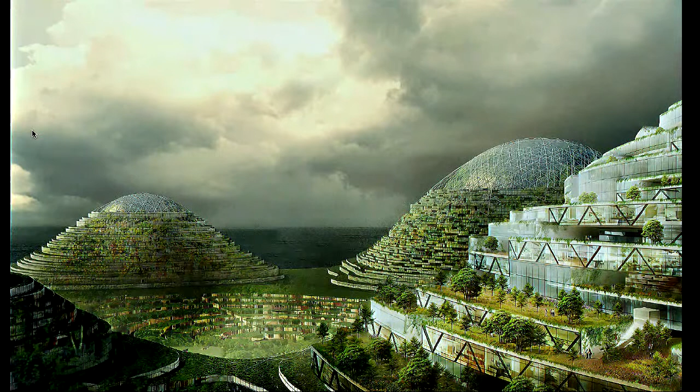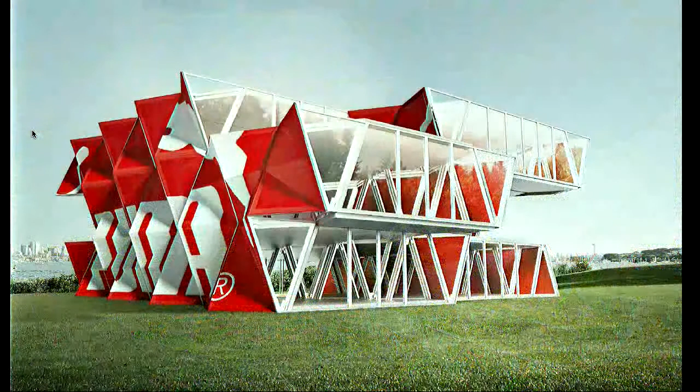It's pretty interesting because we are a group of 20 individuals, very smart individuals, with a background in architecture, design, and graphic design mostly. Our consultants range from structural engineers to landscapers to animators and many others who are constantly joining us on the different projects we're adapting.

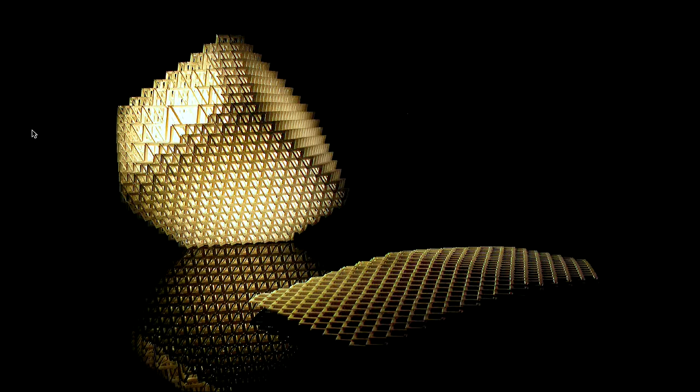We are committed to two things: innovation and improvement of well-being. I'm very lucky to be here today to share with you one idea that started some years ago.

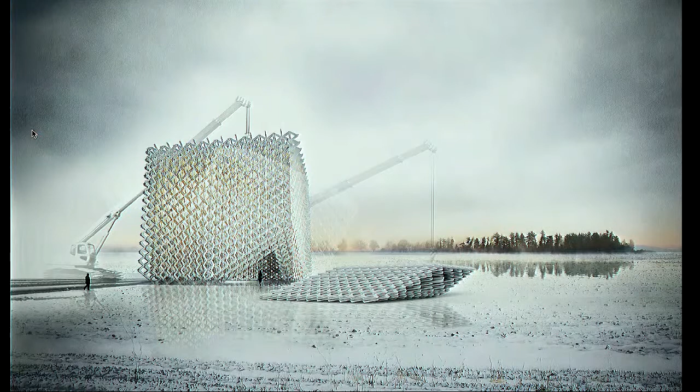In fact, in our workshop, we accidentally played with certain geometry and certain physical parts, and that actually started what we now have as our own R&D part of our practice, which constantly thinks about ideas that nobody, in fact, asks us to do.

So it was not born from an RFP. It was not born from any brief or request of a client. And in fact, it started and continued to a point where we actually bring different ideas and share them with different people.

The idea that we're going to share with you today was born from a conversation we had with Leticia, and she, in fact, is the one who believed that some of the things we've done could be beneficial for construction sites.

Today is, in fact, the first time that we're going to show this idea, in its current form. But prior to that, maybe we can speak a little bit about the condition of the sites.

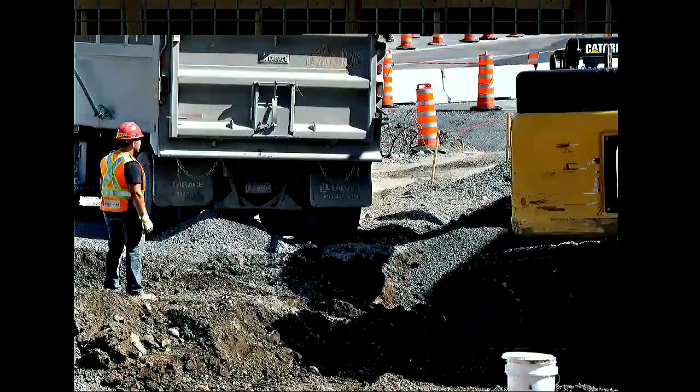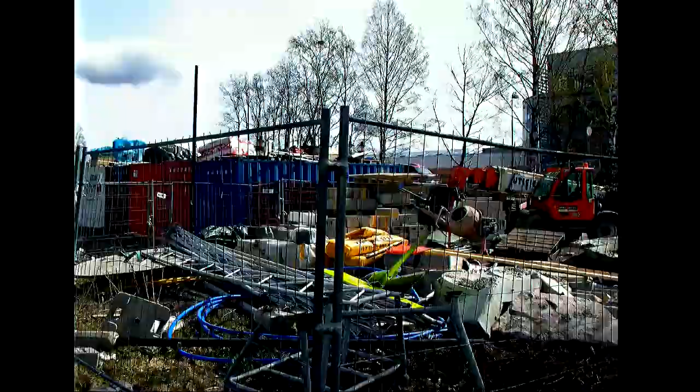Of course we've been speaking all day about construction sites, and I don't have to remind everyone what the pitfalls of construction sites are. In a few images we can see that construction sites are noisy, unfriendly, dirty, inaccessible, dangerous areas of the city, and throughout the course of their life they ultimately become very prohibitive areas in our various cities.

And we're all here today because this is not a small problem. In our day-to-day life in New York, countless construction sites shape the way that we experience the city.

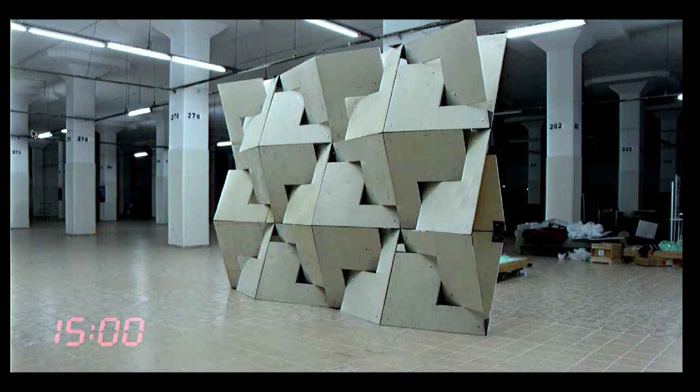So there's always this ability to basically position them next to each other, on top of one another, and create this kind of wall. We realized that basically what we invented at that point is a new typology, a new wall that can actually do a lot of different things.

What we're going to focus on today is the ability to use this construction method potentially for a construction barrier. This is pretty much the beginning of one idea that we're sharing here with you today. And of course, we know that there's a lot of different things we need to overcome before we can actually do that.

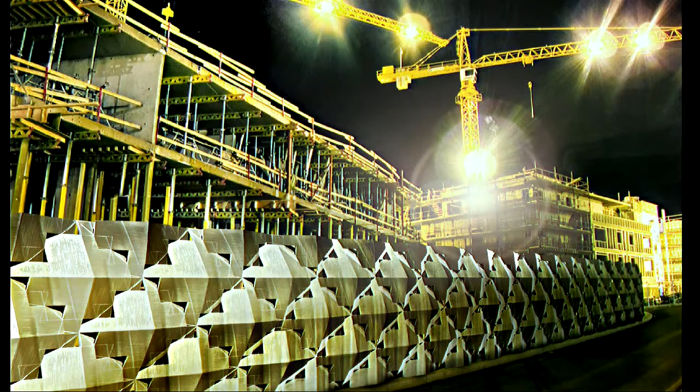One of the speakers before, Colin, was showing us that people walk slower next to something that is more attractive. And I was wondering, what does that mean? Does that mean those people are actually having more fun, enjoying themselves? Is that the reason why their pace is slower?

Can a construction site barrier do that? Can we think about them as beautiful elements rather than just reducing their ugly presence? So what we're trying to do is actually make them beautiful walls, which essentially are just a canvas.

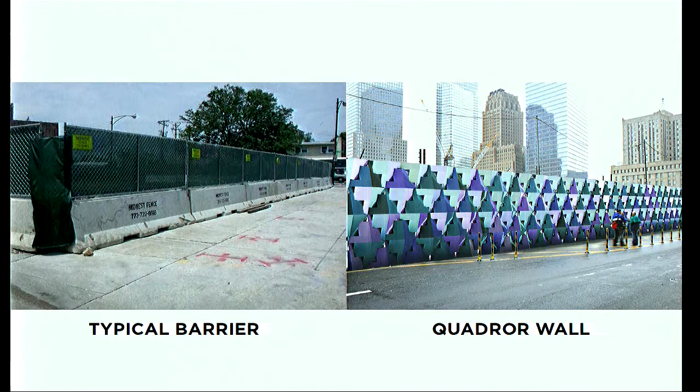We can invite artists to do different things with them. We can communicate messages with them. We can share what the construction is all about through a new type of wall, a new type of structure.

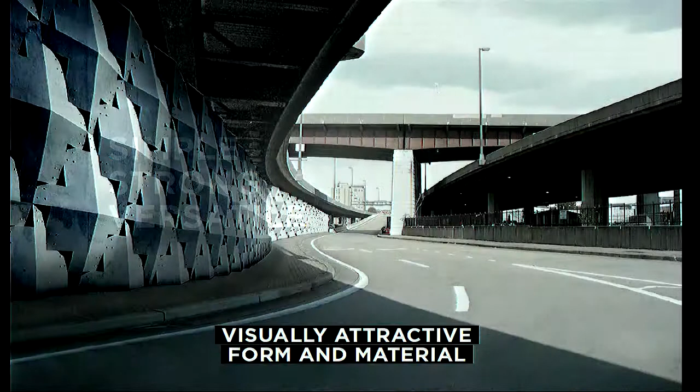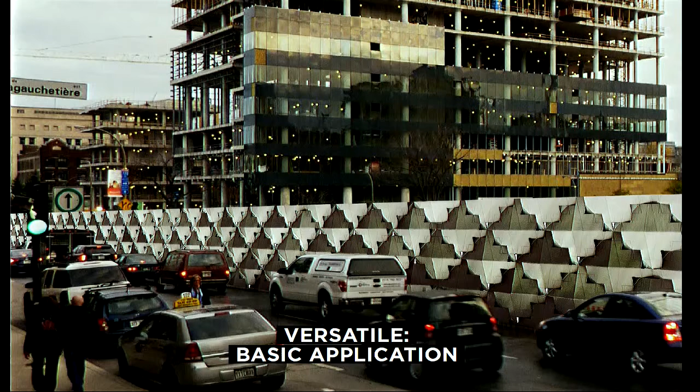It's simple, it's very strong, and it's very versatile. It can be made out of a lot of different kinds of materials and proportions, and that would affect the cost, the deployability, and the reusability of this construction barrier.

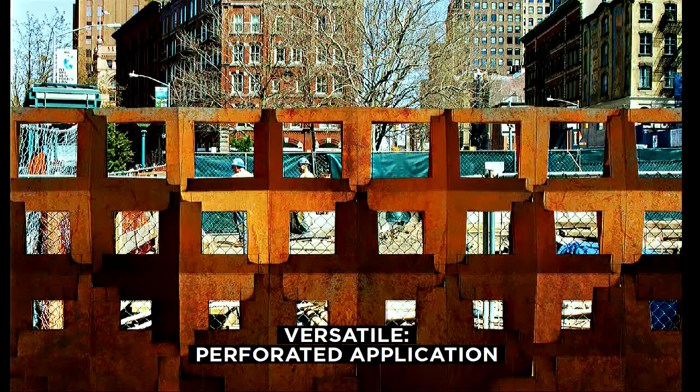I think as we could see in these examples, there's a versatility and playfulness that touches on a lot of the topics that came up today. There could be a vegetated application which engages passersby in a different way, or different perforated applications—just one instance of many possibilities to engage people on the sidewalk and give them a different understanding of what's inside the construction site.

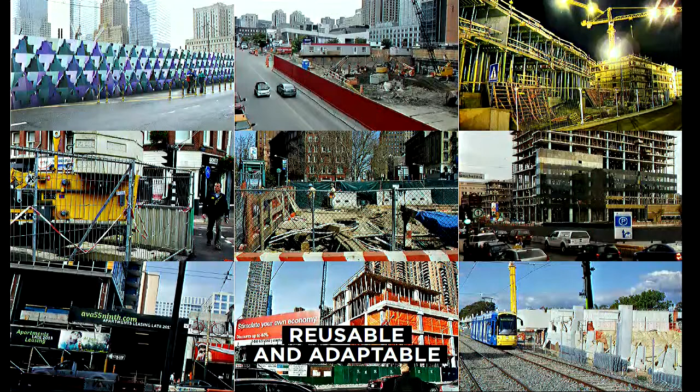And as we develop this, they would be reusable and adaptable depending on the different materials we explore and in which they are made. So they could have a variety of uses, and their lifespan could be a big plus for their application.

One thing we looked at, in collaboration with different engineers—we had quite a lot of conversation with the ARUP team in New York, who pointed out a very interesting fact: can those barriers improve the sound, can they actually reduce sound from a construction site? This is an assumption, because of the geometry it seems to be the case.

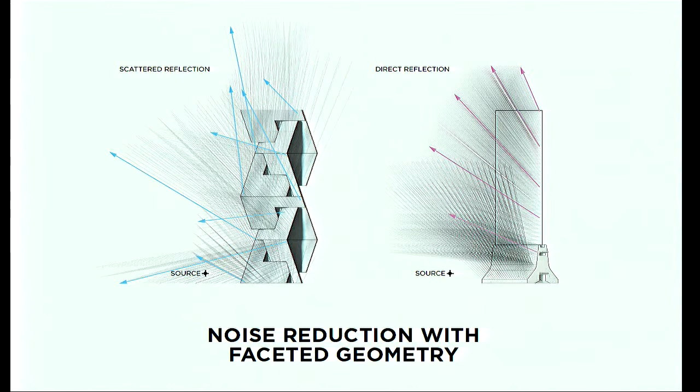I think in the previous presentation we've seen just one angled piece on top and the reduction of noise there. This is definitely something we're very much interested in investigating and checking further as we make them.

One other point: our main comparative point was the traditional Jersey barrier, which everyone is familiar with. So in terms of size and scalability, there's already an ability with the Quadror to have something familiar to the construction site in a very unfamiliar way, with a lot of potential for different uses.

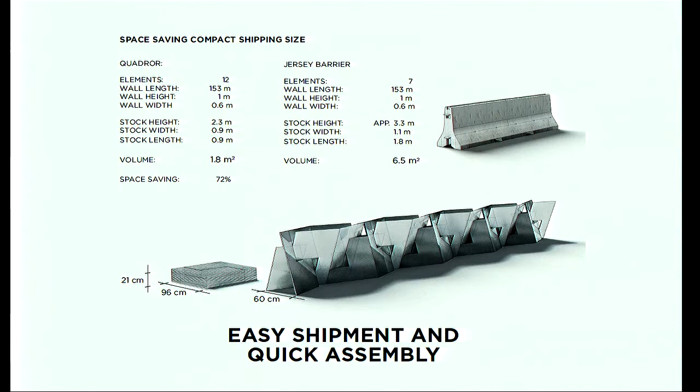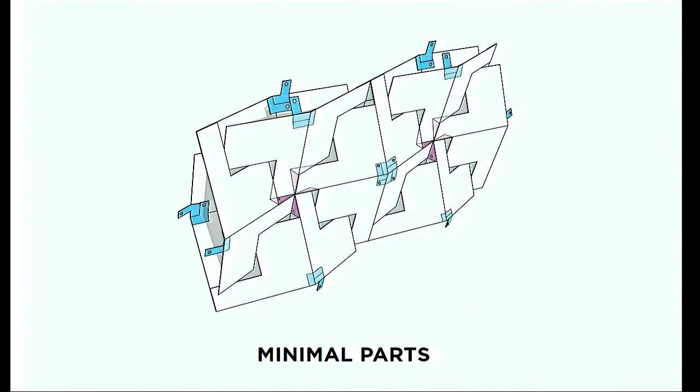We've been trying all kinds of different construction methods and connection possibilities, depending on whether it's made of sheet metal or wood. In this diagram, we're using two parts: a component that attaches the pieces to one another, and the component itself, made out of 4 identical pieces. Because of the repetition, the ease of manufacturing is quite obvious.

So, to the next steps. I know there will be questions about costs, and that's going to be one of the main things to address. It's a direct relationship to the material we're using, the proportions we're using, and the production methods, which are tied to the material and the assembly technique we end up using.